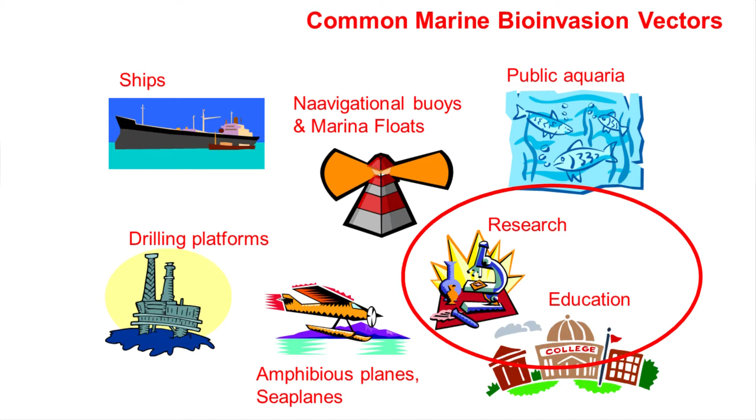For example, the ships, which I will come to a little later in my slides, but looking at other things, academicians themselves could be responsible for the unintentional introduction of organisms into their backyard. It is possible that one goes to a place for collecting organisms, brings them back to their laboratory for carrying out some research, and after their limited period of purpose is over, they are transferred into an environment close by, which allows it to expand its habitat. So, you cannot exclude researchers unintentionally introducing.

There are cases in the world where such incidences have taken place, but foregoing that, you can look at other systems like public aquaria, the case that I explained to you earlier on zebra mussel, where people themselves took it to other places and introduced them to a new system where it could not have reached by itself.

The navigational buoys, which are an important part of the maritime industry, the drilling platforms, and amphibious planes have an equal role in transferring organisms from one place to another. The reason being the surfaces they offer, submerged in the sea, act as a place for organisms to settle. And once these move from one place to another, they can introduce organisms to newer environments. So, they provide a mechanism for the dispersal of organisms at a greater strength.

Now, if you look at some more of them, even the recreational equipment that we use carries biofilms. The dry docks that we have in our coastal systems for ships to come in and park, where they are cleaned or the muck in their tanks is cleaned up, can wash up several millions of organisms to the surrounding environment, leading to a pathway for introduction.

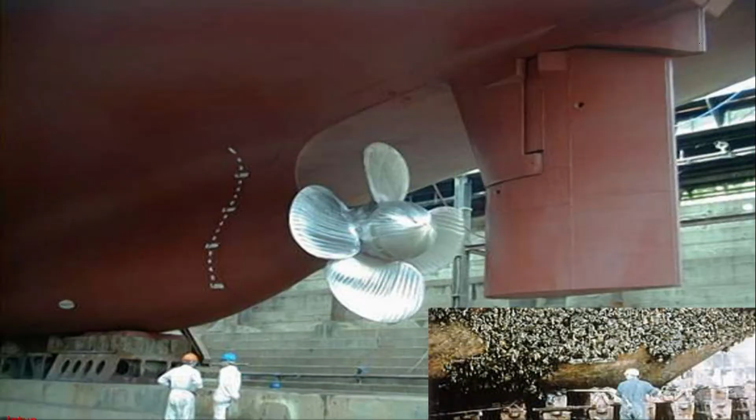Now, taking a look at the first vector, which is the biofouling. This slide shows you a clear image of the ship hull, the propeller, when it is brand new. It is devoid of any organism and the ship owner does not want any of that to be growing, because he would like to have the ship's hull as clean as possible. He gets them coated with anti-fouling paints.

But over a period of time, because anti-fouling paints may not work as effectively or have their own lifetime, they transform themselves to a condition of this kind, where you can see a lot of organisms growing up there. So, with the ship hull growing older in the water, there are plenty of opportunities for organisms to get a hold on that, attach themselves and grow. In the next slide, I will illustrate to you how exactly this biofouling process takes place.

Now, in the previous slide, you probably saw a clear picture of the ship hull, which is as clean as this. Within a few weeks' or a few months' time, it is filmed by various microorganisms like diatoms, bacteria, and other kinds of organic material, which change this well-coated, painted surface to one that is filmed, which is just like if you don't brush your teeth for a couple of days, you will have a film on your teeth and it causes deteriorating effects.

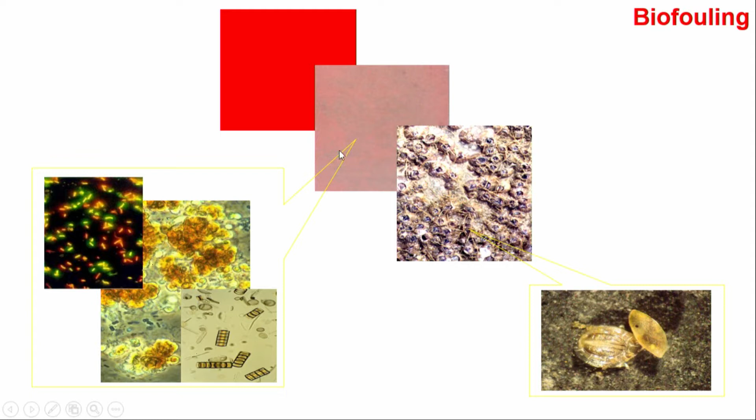A similar kind of feature exists in the marine environment, and that actually leads to organisms sensing the presence of a surface, and larvae of higher organisms detecting the presence of the surface, occupying that niche and establishing their community. And that leads to a macrofouling community. A diverse range of organisms can inhabit there, including the ones that actually take shelter in those places. So, most of these organisms that are reported to have traversed could have also gone through hull fouling as a vector, travelling from one place to another.

Now, why is shipping important? If you take a look at this clipping that is taken from a movie made by the Global Ballast Water Management Program, you can see that

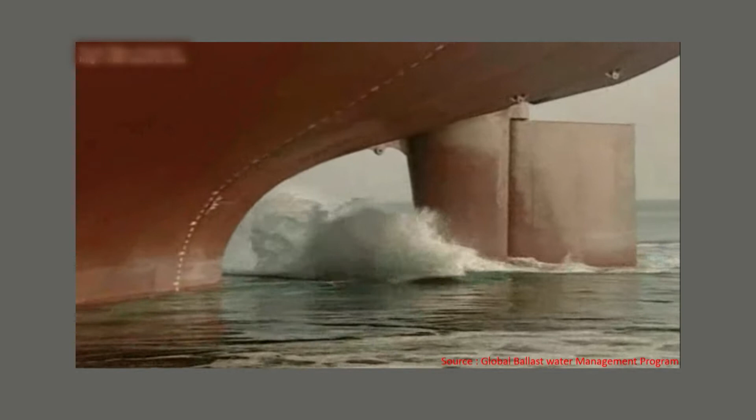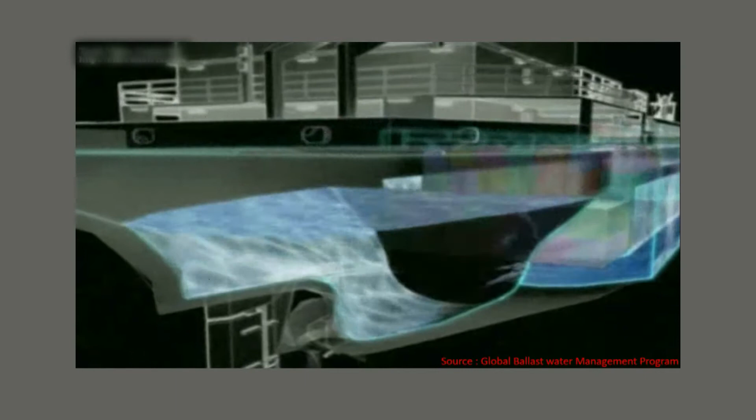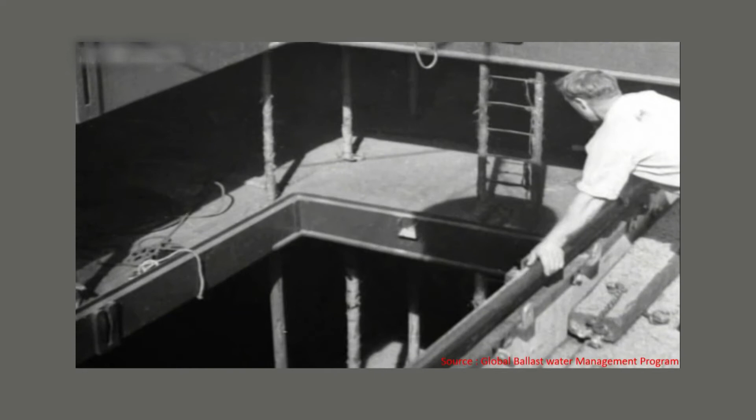All ships must carry ballast to keep them steady and level in the water. When unloading cargo, a ship has to maintain its weight on board to stop it rising up and capsizing. And so water is pumped into specially designed tanks. For centuries, ballast came in the form of rocks and sand. But loading solids onto ships was time-consuming and expensive. Then came a revolution in ship design. During the 19th century, wooden hulls were replaced by iron and steel. As these hulls were durable and watertight, it soon became clear that seawater could replace sand and rock. And in harbours, it's always on tap.

Now let us take a look at some of the facts and figures of the shipping industry. Shipping is a very important, very economical mode of transport. It carries more than 90% of the world's commodities, so one cannot live without shipping. A single bulk cargo ship of 200,000 tons, when it's carrying ballast, can carry around 60,000 tons of ballast water.

So, a rough estimate shows that 3 to 5 billion tons of ballast water is transferred from one place to another every year. Another estimate also shows that every 9 weeks, a marine species invades a new environment somewhere in the world. Now, imagine a port receiving water from a given bioregion repeatedly because of a particular type of trade; it would inoculate enormous quantities of water coming from that bioregion.

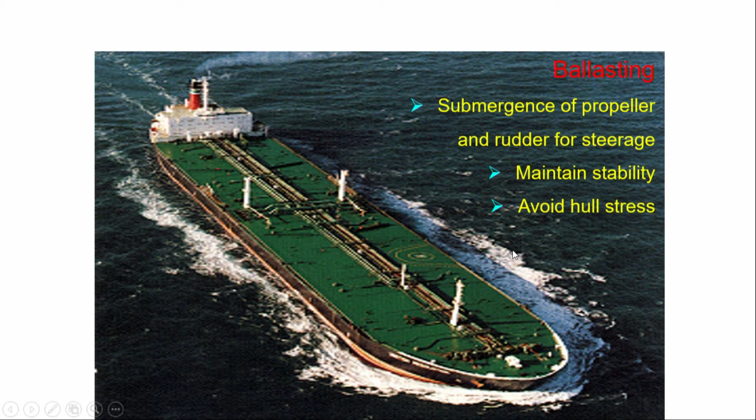Now, carrying water, as illustrated in the clipping, is very important, because without the ballast water, when there is no cargo in the ship, the propeller cannot be submerged, and it has to maintain its stability. And ballast water is required to avoid hull stress. So, there is no possibility with the current designs of ships to have conditions where no ballast water is taken in when there is no cargo.

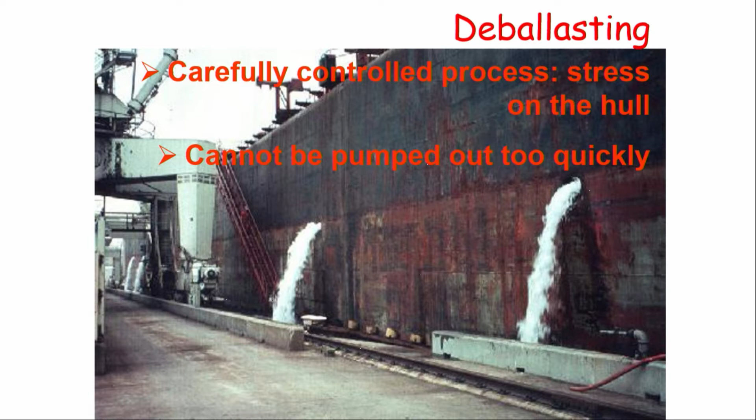The most important factor of this vector is that deballasting generally takes place in the port environment, because that is where the cargo is taken in. And deballasting is not an immediate process; it is a time-consuming process, and it has to be carefully controlled and cannot be pumped out too quickly, because there are limitations of the pumping capacity, limitations of the handling of the cargo, limitations of crew availability and many issues. So, it is a prolonged process.

So, under this context, treating ballast water becomes an important integral part of the exercise to control bioinvasion. Now, just to give an overview of how much ballast water can actually be transported from one place to another, depending on the type of the vessel, you can see that it can be minimal or negligible if it is a passenger vessel. But if it is a bulk carrier of 250,000 deadweight tonnage, the normal ballast condition is about 75,000 tons, which is about 30% of the deadweight tonnage, or it can be as high as 1,13,000 tons, which is 45% of the deadweight tonnage.

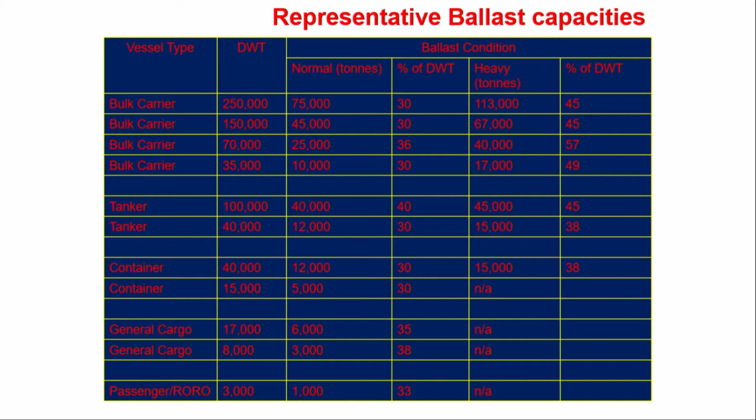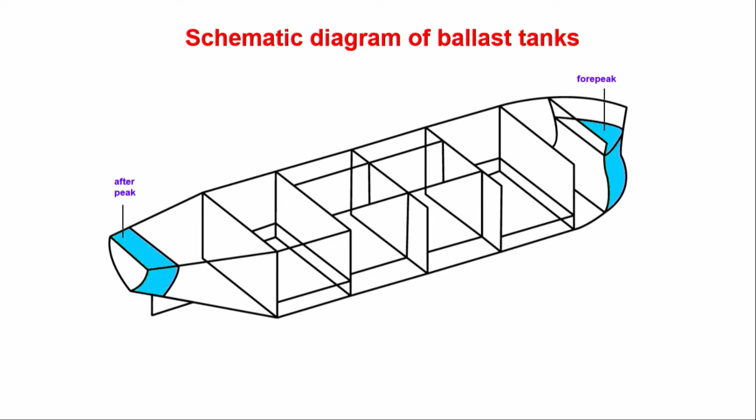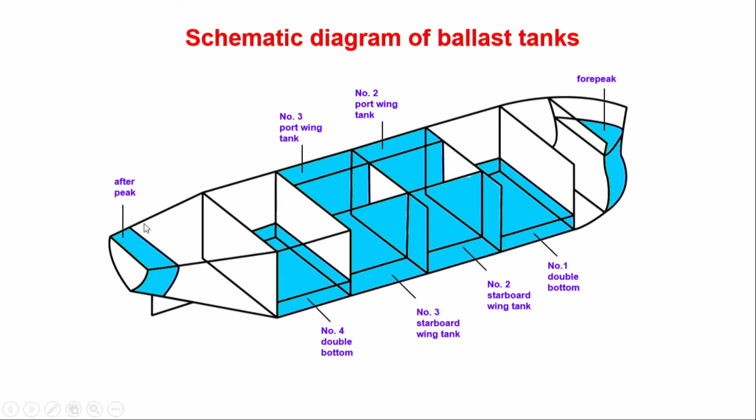So, this is an illustration to show that most of the ships which carry cargo have to carry ballast when there is no cargo, and that is the root of the problem for transferring organisms from one place to another, where the ship is considered as a vector. Now, what are ballast tanks? Here is an example to show you that there are many tanks distributed all along the design of the ship. There are several tanks which are labeled as double bottom tanks, starboard wing tanks, fore peak tanks, or after peak tanks. Each one of them is clearly designed to carry some additional weight as and when required when there is no cargo, and that is facilitated by the arrangements in the ship.

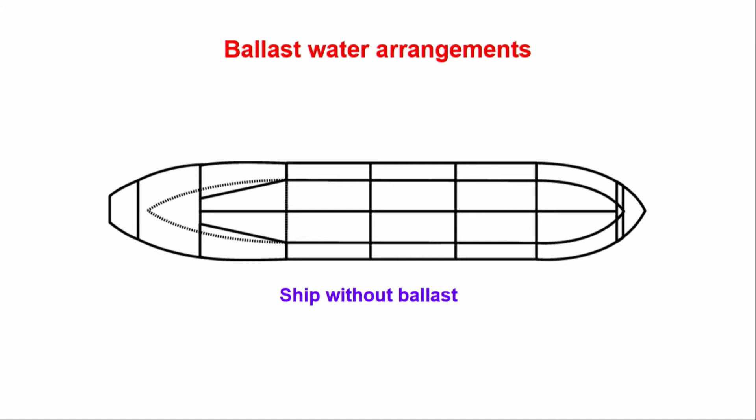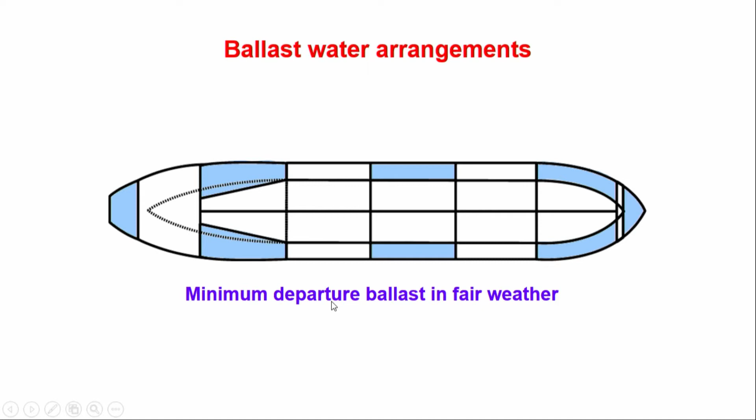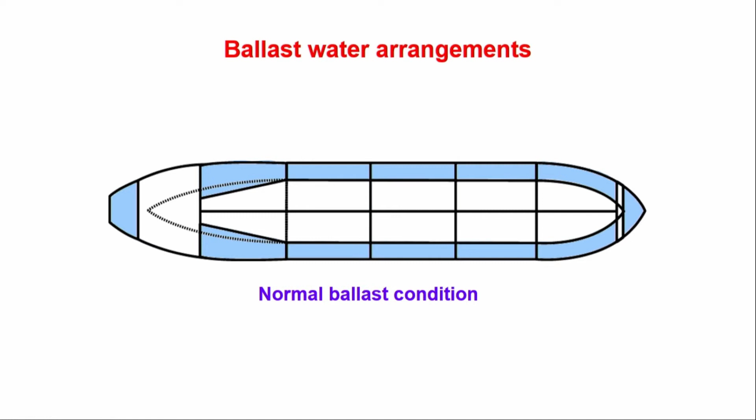And so, a ship without ballast would actually look like this, and this is an unrealistic situation. And then if you look at a minimum departure ballast in fair weather, because as the weather becomes rough, the need for more ballast water becomes an important aspect, because the ship's stability has to be maintained. In this context, you can see some of these tanks are kept vacant with this minimum fair weather departure ballast. Now, if you consider stormy conditions, which a captain can encounter on the high seas, he actually loads up more ballast so that the ship is much more stable. From normal ballast condition to storm ballast condition, you can see that the tanks are loaded as required by the sea state when the ship is in voyage.

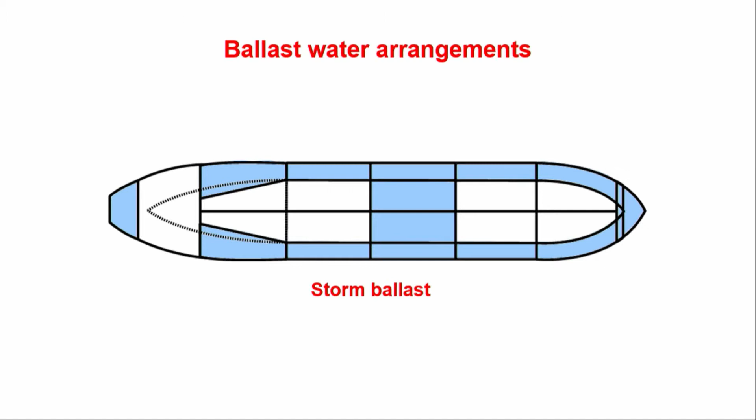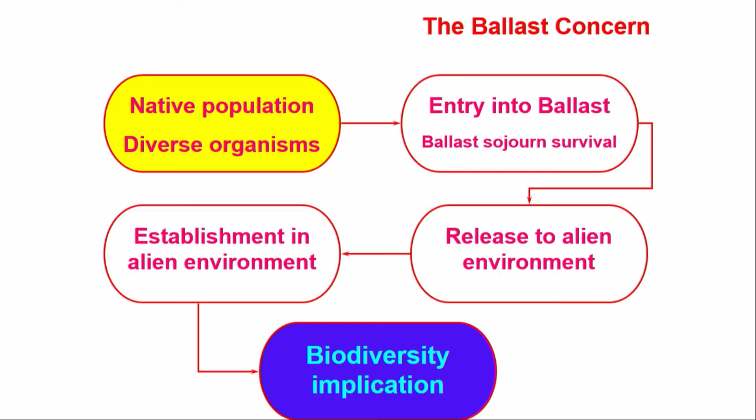Now, does that mean that this water that is transported from one place to another actually helps the invasive organisms holistically, totally? The answer is not always true. It is not 100% foolproof that all those organisms that take a sojourn into an alien environment get a foothold. Now, if you carefully look at these next few slides, the native population has diverse organisms, and some of them actually enter into the ballast tanks. The ballast tanks are not an open ocean environment; they are hostile environments, and organisms have to survive this journey. Those organisms which survive this journey, are released to alien environments, subsequently establish, and are considered to have biodiversity implications are an important area to be considered in bioinvasion ecology.

Now, as told a little earlier, the ballast tanks are not as good as an open ocean environment. The fresh ballast source community comes from an open ocean or coastal environment where the conditions are very useful for the organisms to grow. But once they are taken into these tanks, it is dark, there is no light available, the temperatures can change with the voyage, and the biogeochemical conditions can change, altering the system holistically. In that condition, you will have 4 different scenarios. Some organisms absolutely cannot survive because there is a light requirement or a specific food requirement, or they are very short lived; they will perish. So, those are not of concern to bioinvasion ecology.

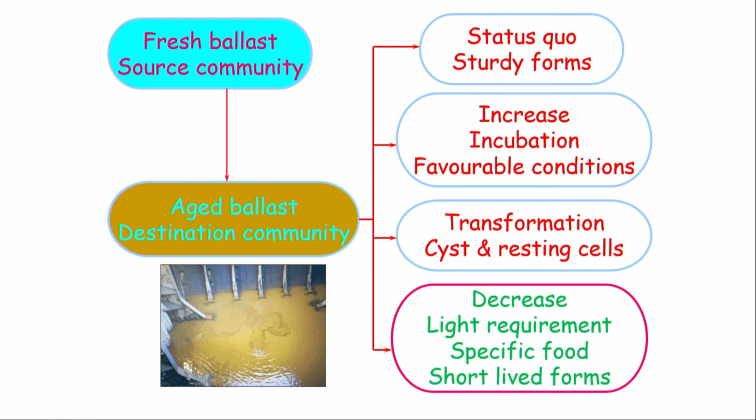But the other 3, marked in red here, for example, those organisms which do not care where they are but can survive, and some may actually like it because there is a lot of organic material being created in the ballast tank, serving as favorable conditions. Some of them may not like it, for example, the dinoflagellates or phytoplankton, which may transform themselves into cysts or resting cells. So, all these 3 conditions actually facilitate translocation of organisms from one place to another as part of the ballast tank population. In the next few slides, I will illustrate the impacts caused by marine bioinvasion.